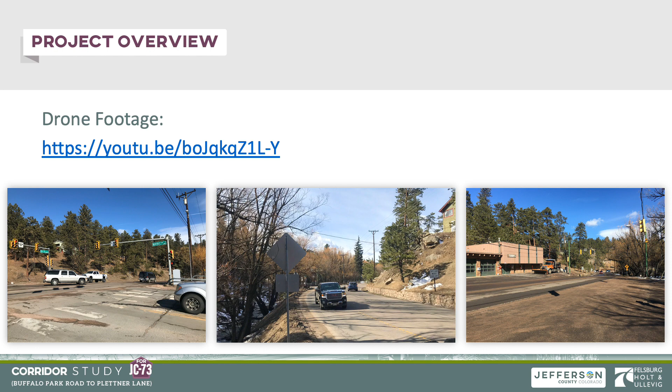In the next few slides, we will be reviewing existing features along the corridor. If you'd like to review drone footage of the existing roadway segment, please pause this presentation and visit the YouTube link embedded on this slide, or it is also available on the project website.

Jefferson County Road 73, or JC-73, is the primary route for residents of Evergreen between their homes and destinations along State Highway 74, with ultimate connections to I-70 and C-470. Access to US 285 at Conifer is also available along JC-73 to the south of the project corridor. This roadway is also a link for hundreds of thousands of visitors each year. In the event of an emergency, this roadway is one of the few primary evacuation routes for the foothill residents of the county.

JC-73 has long been identified as a road where improvements are needed, especially bike and pedestrian infrastructure, shoulders, and access to properties, businesses, and downtown Evergreen. Transportation Improvement Program, or TIP funding, has been secured to construct safety and operational improvements including bike lanes, shoulders, and pedestrian facilities. The roadway is also being reconstructed, including drainage improvements and bridge replacement.

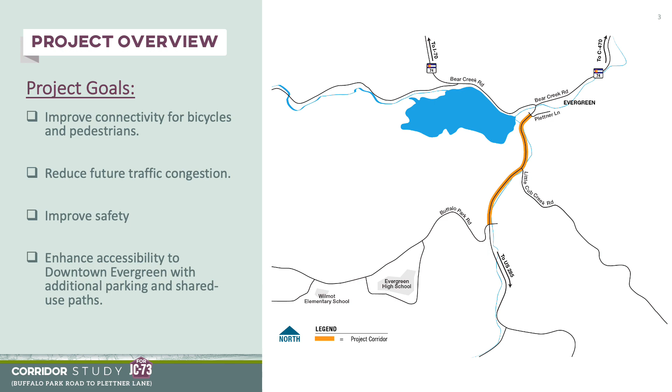The main goals of this project are to improve connectivity for bicycles and pedestrians, reduce future traffic congestion, improve safety for all users, and enhance accessibility to downtown Evergreen with additional parking and shared use paths.

Jefferson County is working with a consultant team to assist on identifying conceptual design alternatives to identify a preferred alternative and to complete conceptual level design plans for an approximate half-mile segment of JC-73 between Buffalo Park Road to Plettner Lane.

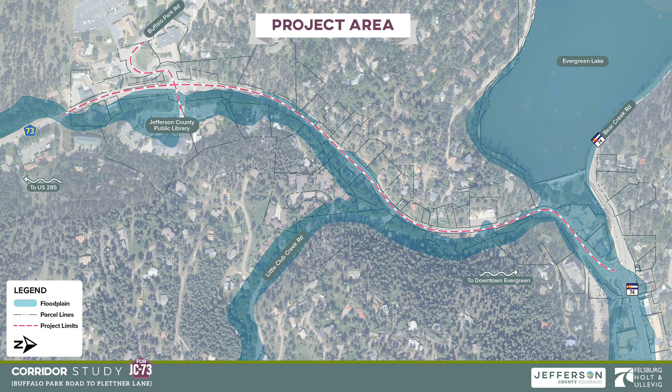Existing bicycle and pedestrian facilities within this project area are very limited. An existing 5-foot sidewalk is located on the east side, north and south of Buffalo Park Road, but terminates approximately 300 feet north of the intersection. The next segment of sidewalk isn't until the northernmost end of the project limits along the west side across from Plettner Lane. There is a social path, or a worn path, present along portions of the corridor.

This worn path is present namely along the top of the rock wall on the western limit of the roadway. There are several property accesses via stairwells that terminate at the very narrow roadway shoulder. The presence of these social paths indicates public is looking for pedestrian access along the corridor. Lastly, steep embankments and narrow shoulders force bicyclists to ride in traffic along the roadway segment.

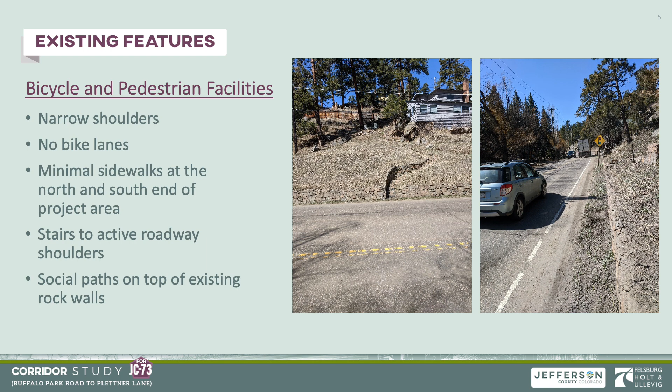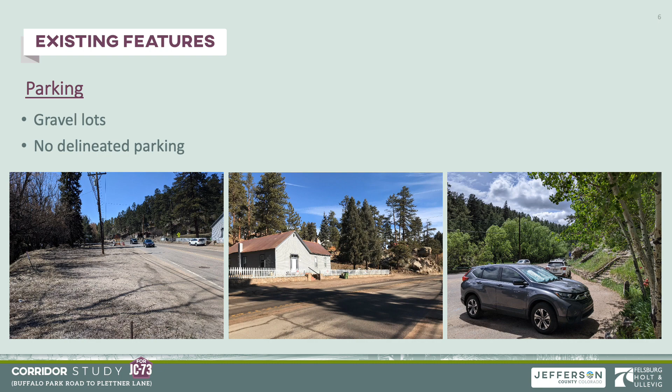The corridor contains several locations where large dirt pull-offs have been used as informalized parking for access to businesses, residences, and downtown Evergreen. These informalized parking lots tend to provide an inefficient number of parking spaces and inadequate crosswalk or accessibility for all users.

Additionally, the existing roadway does not meet minimum design requirements for roadside safety and sightlines. There are rock outcroppings along the corridor that limit driver sight distances from stopped vehicles, animals, bicyclists, or pedestrians. Most of the segment does not contain turn lanes for residential and business access, which exacerbates the congestion due to high traffic volumes.

Lastly, the embankments for the creek do not have a recoverable slope, which means that an errant vehicle leaving the roadway will continue to the bottom of the slope, thus increasing the likelihood of property damage or injury. This is especially concerning due to the year-round presence of water in the creek.

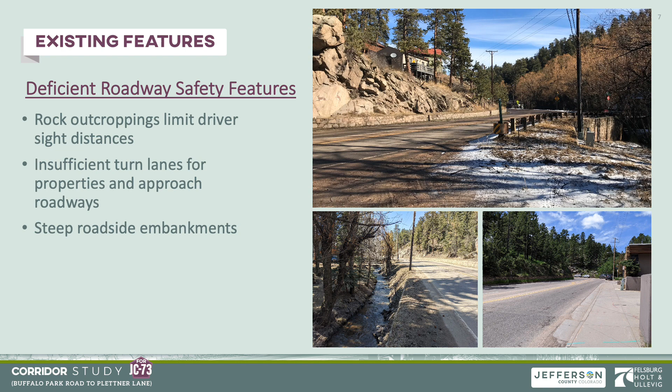Now that we've discussed some of the existing physical features along the corridor, we will dive into the existing traffic patterns, safety, and what the future could look like if no changes are provided. First, some background knowledge and level of service.

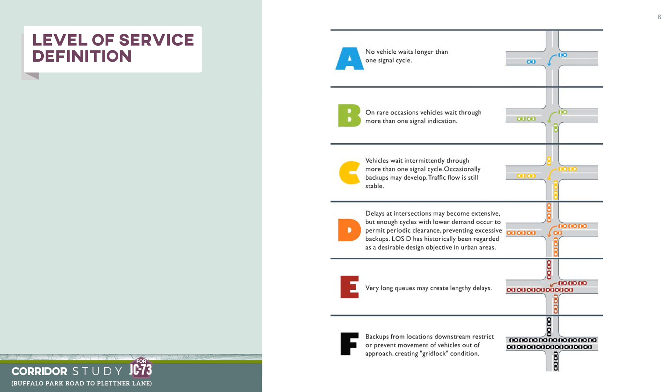Level of service, or often abbreviated to LOS, is a qualitative measure of traffic operational conditions based on roadway capacity and vehicle delay. LOS is described by a letter designation ranging from A to F, with LOS A representing almost free flow travel, while LOS F represents very congested conditions. We will refer to level of service throughout this presentation, comparing the existing conditions to the proposed concepts developed to date.

The existing traffic volume data was recorded pre-COVID-19 stay-at-home orders. The data includes daily 24-hour representations of traffic volume levels along specific roadway segments. Intersection turning movements were recorded at 4 locations: Buffalo Park Road, Little Cub Creek Road, Plettner Lane, and State Highway 74.

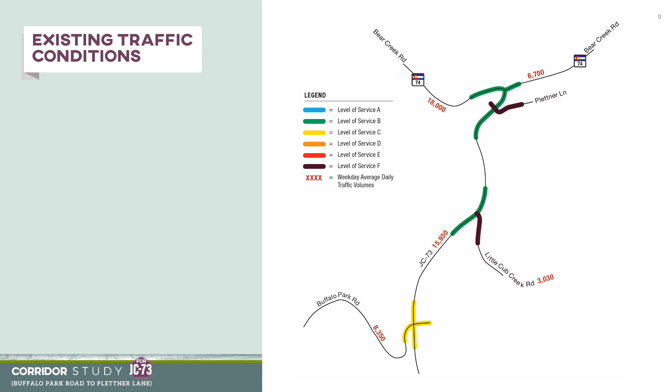Lastly, Plettner Lane and Little Cub Creek are stop-controlled intersections and do not operate as well as their signalized partners. These locations reach level of service E or F during peak hours, but the poor level of service is not a function of the level of traffic on these side streets, but rather caused by the level of vehicle movements traveling along northbound and southbound JC-73.

There were 65 crashes over the course of 5 years, which equates to approximately 1 crash each month over the entire corridor, a relatively low crash occurrence. There were some injuries, but there were no fatalities, and crashes were mostly concentrated at intersections. About half are rear-end crashes, which is related to stop-and-go traffic, as well as stopping maneuvers at intersections.

The traffic volumes and operations are projected to year 2040 values considering a no-build option, or no improvements completed by the year 2040. The percentage of traffic increases an average of 10% between now and year 2040. This equates to an annual growth rate of about 0.3% per year.

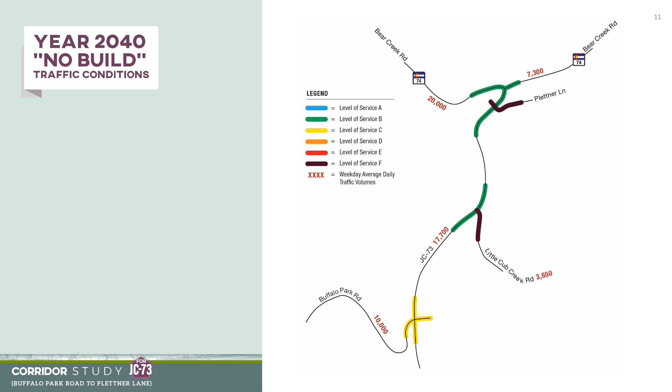While it is recognized that JC-73 may be reaching its theoretical operating capacity given the level of daily traffic, widening JC-73 for additional through lanes provides challenges due to the physical constraints of the natural environment on either side of the roadway and available funding. The next several slides will present the 2 corridor cross-section alternatives Jefferson County is reviewing.

Jefferson County and the consultant team have developed 2 roadway cross-sections which attempt to balance the project goals. These next several slides will step through 2 alternatives and compare and contrast the 2 options. 2 quick reference fact sheets are provided at the end of this presentation that summarize these concepts.

Jefferson County would like to stress these are conceptual level designs. Design will only be completed for the selected preferred alternative, and impacts to properties, accesses, and environmental resources will be analyzed in detail at that point. At the end of this presentation and on the project website, you will find a link where you may leave your comments, questions, or concerns on these alternatives.

The first corridor concept widens the existing 2-lane roadway to a 3-lane section. This section includes 1 northbound lane, 1 southbound lane, 1 2-way center left turn lane, a southbound bike lane, and an 8-foot shared use path on the creek side. This cross-section is better depicted in the section at the bottom of the slide.

A wider cross-section may provide motorists with a little room for error and will improve sight distances around all corners. This option improves the existing parking areas, providing 4 dedicated parking lots. Parking options, along with the benefits and shortcomings, will be reviewed in more detail on slides 33 through 37.

2 potential full right-of-way acquisitions are anticipated to accommodate this cross-section, and Jefferson County will continue to work with these property owners. Temporary impacts or partial property acquisitions have not been analyzed at a conceptual level design.

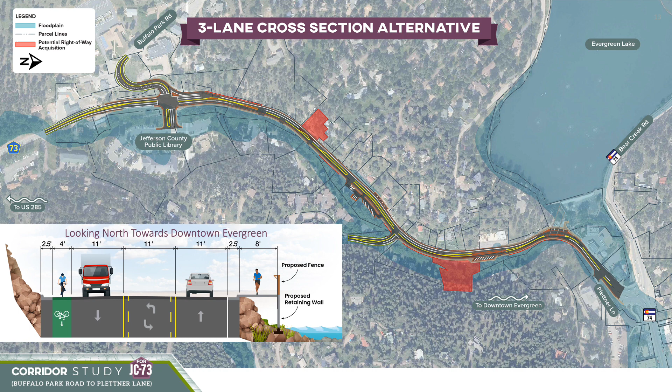Taking a closer look at the alternative, these next few slides will progress from south to north starting at the intersection of Buffalo Park Road and JC-73. Signalized and roundabout options are being reviewed for this intersection. Additional alternatives are presented in more detail on slides 27 through 32.

A heavy movement at this location is eastbound Buffalo Park Road to northbound JC-73. The design may double available left turn storage length to improve vehicle queuing along Buffalo Park Road. Another common choke point is the northbound merge from 2 lanes to 1. This design lengthens the merge area for the lane drop to improve flow of traffic and reduce backups.

5-foot sidewalks will be added on all sides of the intersection with an 8-foot shared use path along the creek north of the intersection. The existing bridge by the library will either be replaced or extended to better line up the Buffalo Park Road through and left turn movements.

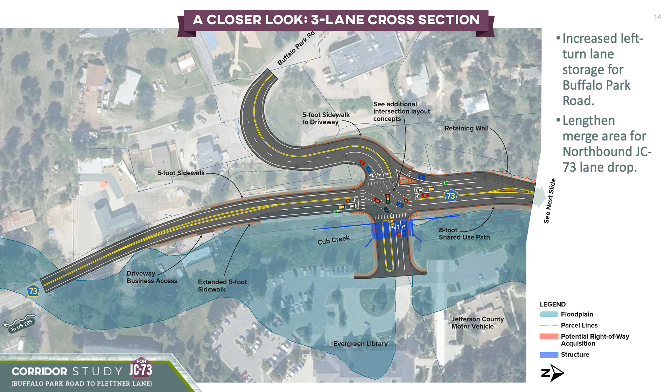Progressing north, this design provides left turn lanes for the business and residential accesses on the east side of the road. The addition of these turn lanes improves traffic flow for southbound vehicles because the turning vehicle can wait for a gap in the northbound traffic without impeding southbound vehicles.

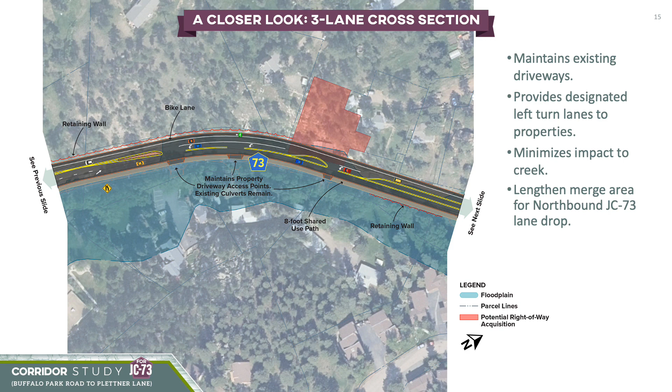All existing driveway accesses and culverts are anticipated to remain, and the 8-foot shared use path continues along the east side by the creek. The cross-section continues to north of Little Cub Creek Road.

A 2-way center-left turn lane is provided in front of the church to provide access to residential properties, businesses, and a dedicated parking lot to the east.

Little Cub Creek Road was modified to provide a designated left and right turn lane. The right turn movement is the heaviest, but is usually blocked by drivers waiting for a gap in the JC-73 traffic to turn left. This layout should relieve some of the backups.

Another dedicated parking lot is provided on the east side of JC-73 across from the fire station. A mid-block crossing may be added to provide additional accessibility to the 8-foot shared use path on the west side of JC-73.

Approaching the northern terminus of the study area, the 8-foot shared use path and 5-foot sidewalk are continued until they tie in at Plettner Lane and the existing sidewalk. The existing drainage culvert will be impacted by the wider footprint and will be extended.

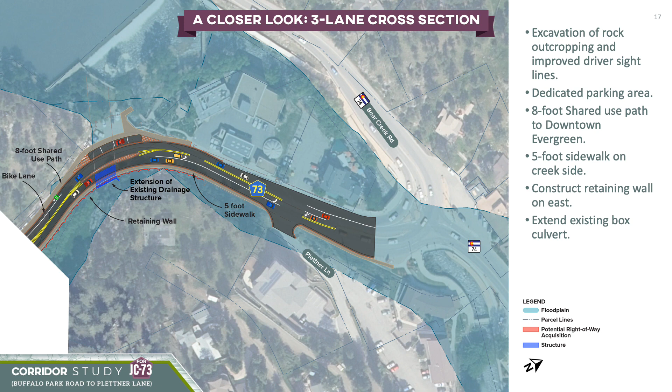A retaining wall is likely required along the east side to cut back the rock outcropping, improving driver and bicycle sight lines. The remainder of the design will tie into existing before the intersection of JC-73 and State Highway 74.

The second corridor concept does not currently have funding available for construction in 2022, but may be considered in a future phase. It widens the existing 2-lane roadway to a 5-lane section.

This section includes 2 northbound lanes, 2 southbound lanes, 1 2-way center-left turn lane, a southbound bike lane, and an 8-foot shared use path on the creek side. This concept is better depicted in the section at the bottom of the slide.

The cross-section may improve capacity and improve sight distance around curves. This option also improves the existing parking areas, providing 3 dedicated parking lots. Parking options along with the benefits and shortcomings will be reviewed in more detail on slides 33 through 37.

5 potential full right-of-way acquisitions may be required to accommodate this larger footprint. These are based on a high-level estimate, and Jefferson County will work with these property owners should this concept be considered at a later date.

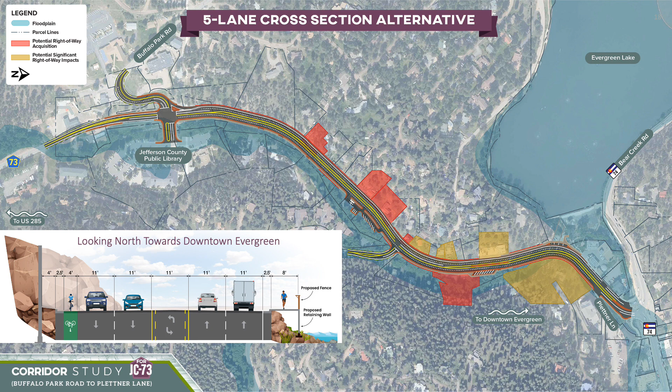Temporary impacts or partial property acquisitions have not been analyzed at conceptual level design. However, there are approximately 4 properties that could see significant property impacts due to retaining walls or creek regrading.

Beginning at the southern limits of the study area, signalized and roundabout options are being reviewed for this intersection. Additional alternatives are presented in more detail on slides 27 through 32.

The modifications shown are very similar to the 3-lane cross-section presented earlier. The 2 differences are there is no merge needed for northbound drivers, and the exterior southbound lane transitions into a right turn lane to Buffalo Park Road.

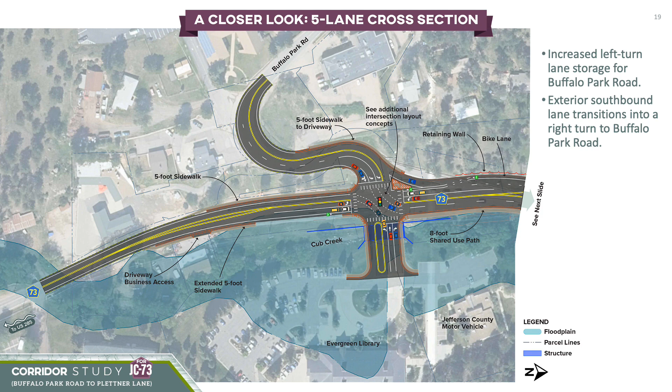Progressing north, this design also provides left turn lanes for the business and residential access on the east side of the road. The addition of these turn lanes improves traffic flow for southbound vehicles because the turning vehicle can wait for a gap in northbound traffic without impeding southbound vehicles.

All existing driveway accesses and culverts are anticipated to remain, and the 8-foot shared use path continues along the east side by the creek.

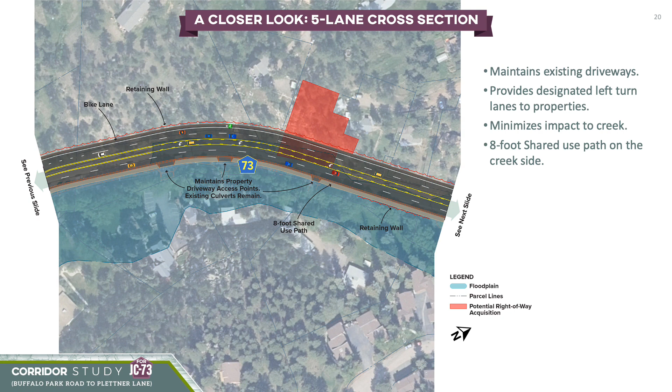This footprint also contains a 2-way left turn lane to provide access to residential properties, businesses, and the dedicated parking lot to the east. The most significant difference is the overall impact that this cross-section has to the western limits and the adjacent properties. A retaining wall is likely needed along the embankment on the west, which may encroach on additional properties.

Little Cub Creek Road was modified to provide a designated left and right turn lane. The right turn movement is the heaviest, but is usually blocked by drivers waiting for a gap in the JC-73 traffic to turn left. This layout should relieve some of the backup.

Another dedicated parking lot is provided east of the fire station. A mid-block crossing may be added to provide additional accessibility to the 8-foot shared use path on the west side of JC-73.

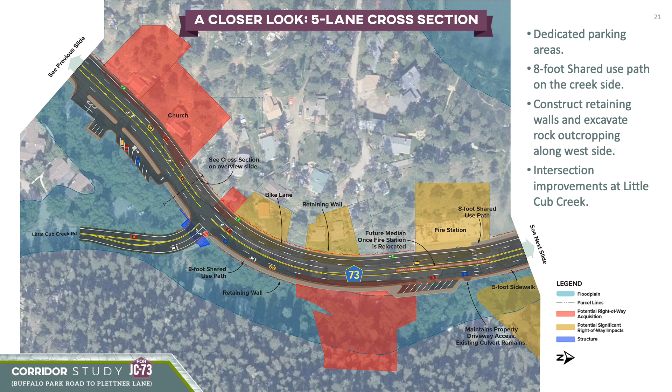Approaching the northern terminus of the study area, the 8-foot shared use path and 5-foot sidewalk are continued until they tie into existing sidewalks. This wider footprint may adversely impact Plettner Lane because the existing slopes are already very steep. Widening JC-73 will require more reconstruction of Plettner Lane to tie into existing, but ultimately it may be removed due to adverse slopes for safe driving conditions.

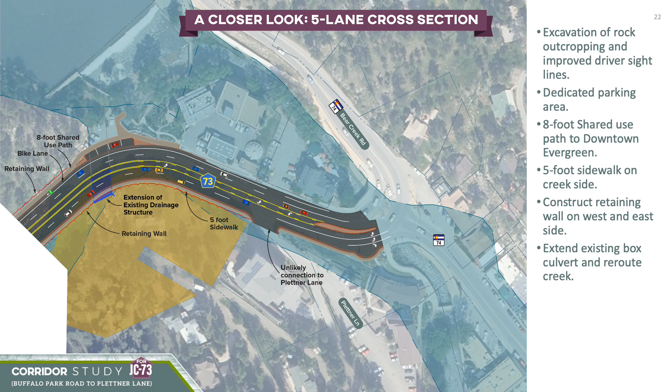The existing drainage culvert will be impacted by the wider footprint as well and will be extended, and Cub Creek will need to be rerouted slightly. Retaining walls are likely needed on both sides of the corridor due to the existing rock outcroppings. The remainder of the design will tie into existing before the intersection of JC-73 and State Highway 74.

The following slides look at screening criteria that fit the project goal themes and assign a positive, negative, or neutral ranking to better depict the benefits and shortcomings for each alternative.

This slide compares the 3-lane and the 5-lane cross-sections for accessibility and right-of-way impacts. The most notable screening difference shown is the impacts to right-of-way and maintaining residential and business access. The 3-lane cross-section will require some right-of-way impacts, but the 5-lane section is much more substantial. And while both provide additional turn lanes, the 5-lane cross-section has a high potential to close Plettner Lane.

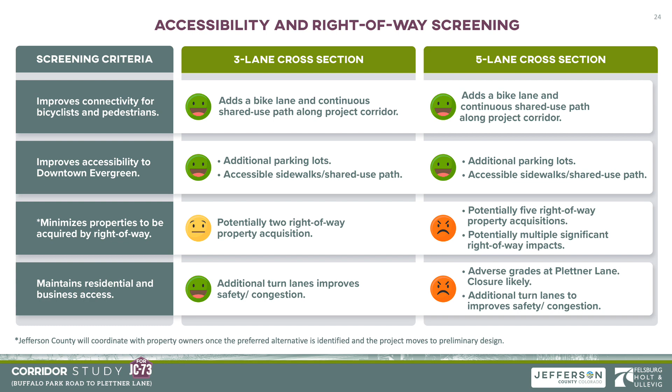The two concepts are further compared for environmental impacts. While any widening of JC-73 will impact various environmental resources, the impacted footprint will be much larger on the 5-lane section. Feel free to pause this video now to review the text in more detail and resume when you're ready.

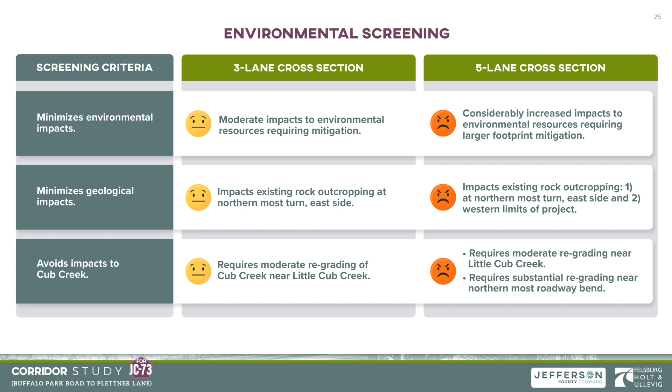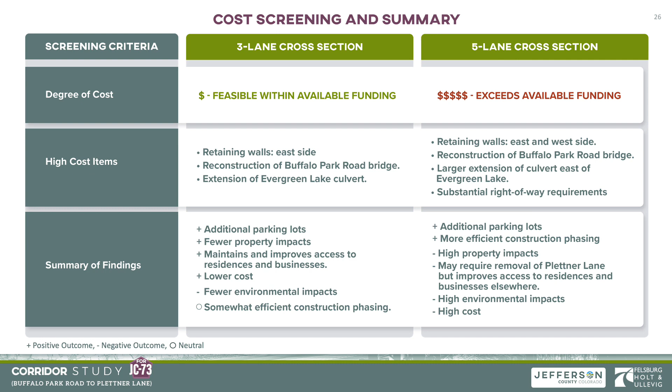Please pause the video now if you'd like to review the matrix in more detail and resume when you are ready. The Buffalo Park Road and JC-73 intersection sees substantial traffic, especially during AM and PM peak hours.

To improve the traffic operations at this intersection, the consultant team analyzed several scenarios and will present the two most feasible alternatives, a signalized and a roundabout intersection alternative.

The existing traffic signal does not operate efficiently, causing longer than desirable delays and vehicle backups. However, the consultant team has determined there are some signal optimizations available that could improve these existing conditions. The improved signal operation cannot be completed without adjusting the existing lane assignment slightly on Buffalo Park Road to remove overlaps between the left turn lane movements on eastbound and westbound.

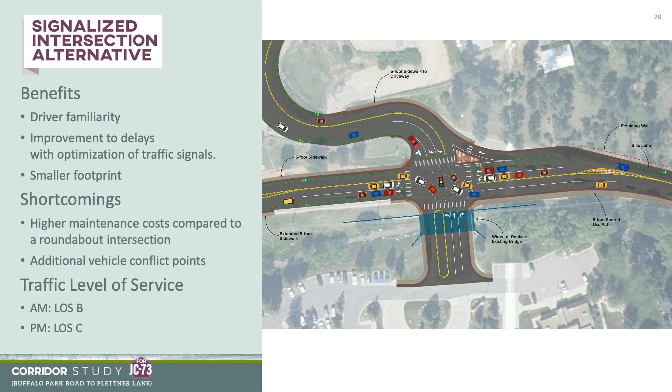For reference, the year 2040 no-build option shows the AM and PM level of service operating at a level of service C. This proposed modification improves the overall intersection AM and PM level of service to level of service B and C, respectively.

A single-lane roundabout was analyzed at this intersection and found it will not provide an acceptable level of functionality during the AM and PM peak hours, even with the inclusion of a southbound right turn bypass lane. AM peak hour will experience level service F, and PM peak hour will experience level service E, a reduction from level service C during both peak periods if a traffic signal continues to be used. This option has been screened out and not provided in this presentation for those reasons.

Instead, a partial 2-lane roundabout is considered because it can provide acceptable level of service for the traffic patterns at this intersection. The heaviest movement resulting in insufficient level of service improvements in the single-lane roundabout is the eastbound to northbound movement. There are many vehicles in the AM and PM peak hours, resulting in few gaps impeding the northbound vehicle's ability to enter the roundabout.

Therefore, the option presented on this slide attempts to remove that issue by including a second northbound lane. This modification improves the overall intersection AM and PM level service to A and C, respectively.

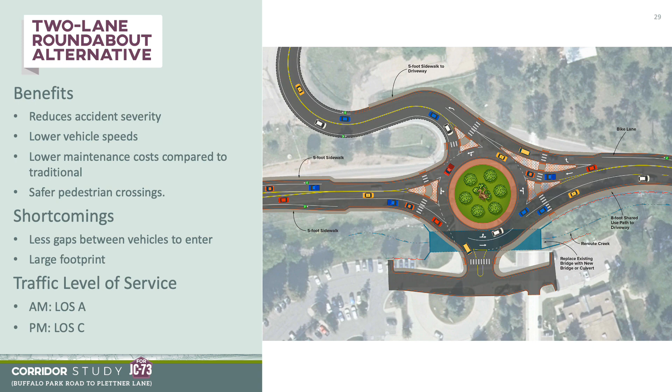When comparing a roundabout to a signalized intersection, one of the major benefits that stands out is the reduction in vehicle conflict points, ultimately reducing the potential for crashes. The shortcoming of a roundabout option is the large footprint. There are steep grades approaching the roundabout from the west that would require substantial reconstruction of the intersection, ultimately leading to impacts to environmental and geologic features and overall construction costs.

The following slides look at screening criteria comparing a signalized and a roundabout intersection. The criteria are assigned a positive, negative, or neutral ranking to better depict the benefits and shortcomings for each alternative.

Comparing the signalized and roundabout intersection, you'll find the partial two-lane roundabout performs better in operations and safety. However, its large footprint has substantial cost implications and is likely to exceed available funding.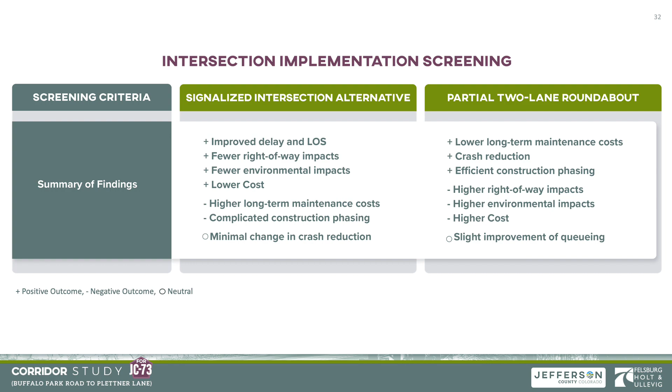Both corridor cross-sections intend to use the existing dirt pull-offs and formalize them into dedicated parking lots. The options provided in the next several slides are suggestions, and the ultimate design of dedicated parking lots will be determined in final design. Additional information for benefits, shortcomings, and examples of the types of parking proposed is discussed in more detail on slides 35 through 37.

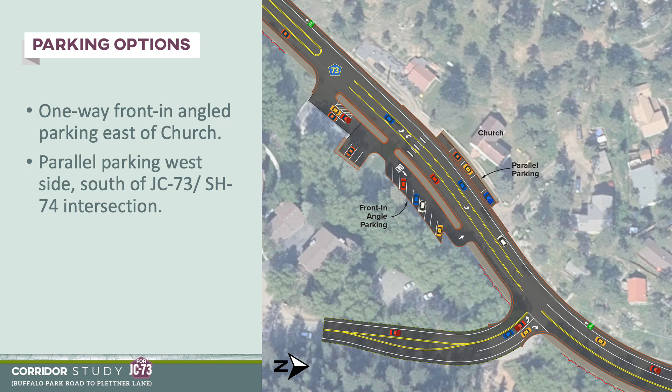There are two existing dirt pull-offs shown on this slide, one east of the fire station and on the west side just south of the intersection of Jefferson County Road 73 and State Highway 74. The suggested dedicated parking for the lot east of the fire station is a back-in or reverse angle parking lot because these spots will be accessed from the northbound through lanes.

Back-in angled parking provides visual benefits to drivers and bicyclists when drivers pull out of the parking space. A raised median may be considered to eliminate southbound drivers from using the back-in angled parking incorrectly. However, considerations will be reviewed in preliminary design to assure the fire station can maintain all movements for fire trucks in events of an emergency.

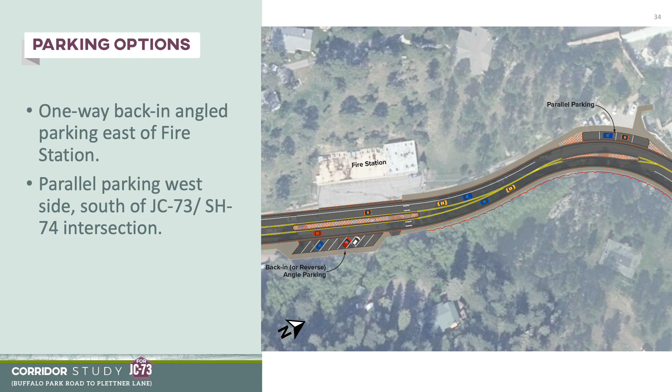Parallel parking is suggested on the west side of JC-73, just south of the intersection of JC-73 and State Highway 74, instead of the current 90-degree style lot. The parallel spots will provide drivers with better lines of sight when entering or exiting their parking space onto busy northbound JC-73.

Next, we'll provide some benefits and shortcomings of the suggested parking types for this corridor. Parallel parking provides the benefit of vehicles requiring smaller parking spaces and have better visibility of all road users when entering and exiting the parking space on a busy roadway. However, parallel parking does not provide as many parking spaces as angled or 90-degree parking lots within the same size footprint.

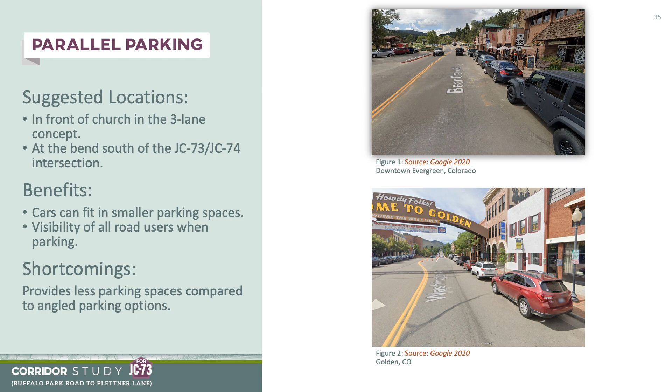Front-in angled parking provides more parking spaces compared to parallel parking, and it is a more conventional driving maneuver. However, this type of parking provides limited visibility for approaching vehicles, bicyclists, and other road users.

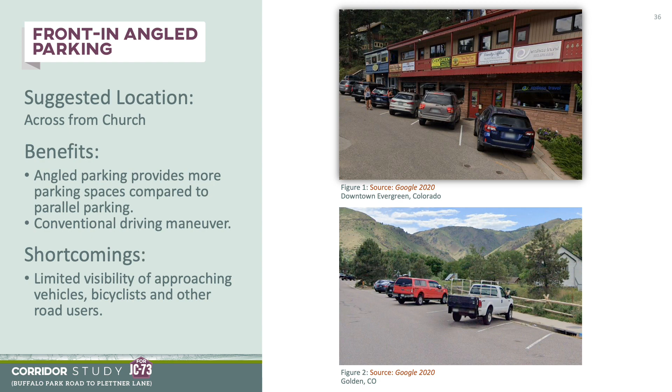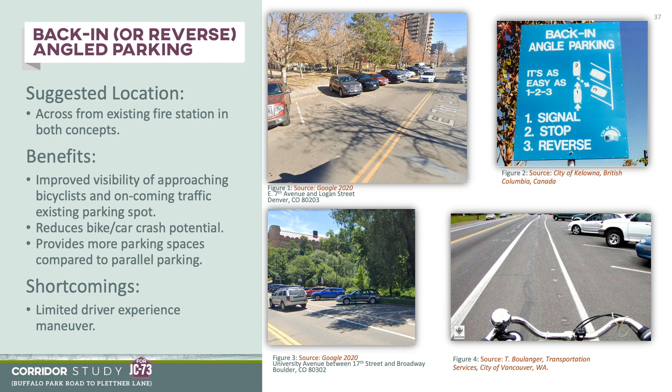Finally, back-in or reverse angled parking is relatively new to Colorado, but there are a few existing examples in Golden, Denver, and Boulder. The benefit for back-in angled parking is there is improved visibility of approaching bicyclists and oncoming traffic when exiting the parking space rather than backing out into oncoming traffic. Because of this benefit, there is typically a reduction in bike and car crash potential. However, because this type of parking is relatively new to Colorado, it is less of a familiar driving experience.

That wraps up the presentation on the various alternatives being considered, and now we'll provide a brief update on the project schedule. In February of 2020, the consultant was hired to complete the current conceptual design phase. This phase is anticipated to be completed by August of this year.

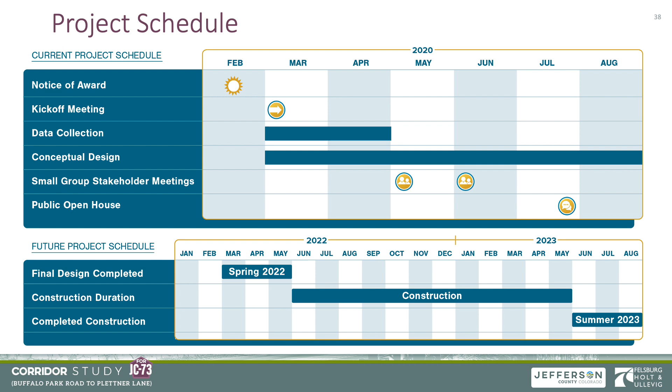Once a preferred alternative is identified, the design phase will commence and is anticipated to be completed by spring 2022. The construction phase of the preferred alternative is anticipated to begin in summer of 2022 and to be completed by summer of 2023 to meet grant funding obligations.